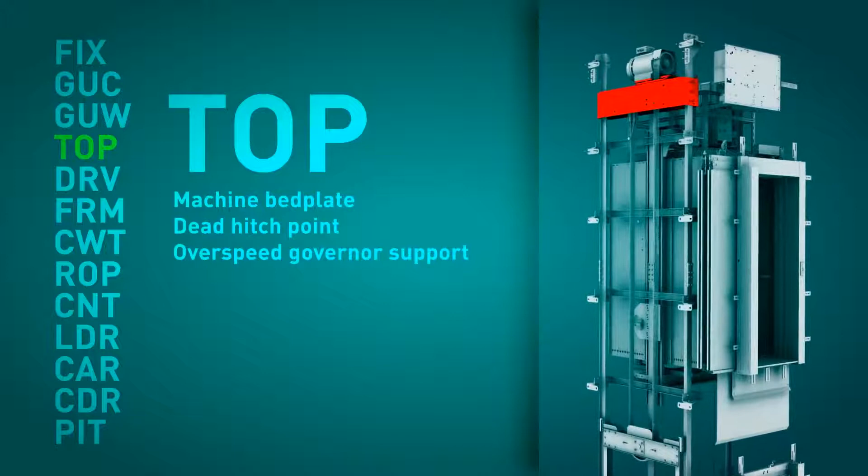Each module can be made up of one or more packages. These packages are identified with a description of the module and its position within the assembly sequence. The supply of the elevator has been designed to fit what we consider to be the logical assembly sequence of a machine roomless elevator.

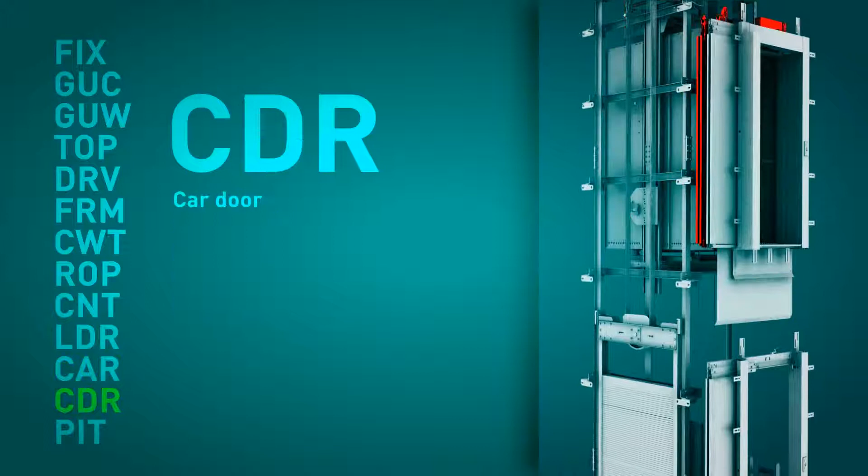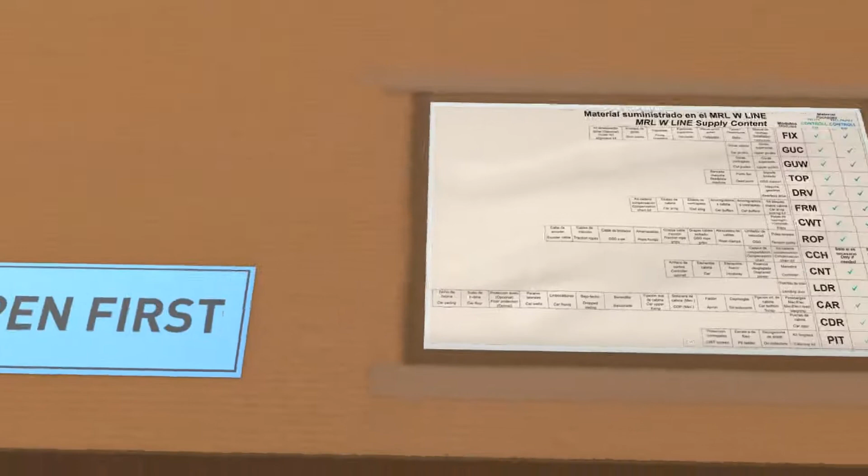The package that we have to open first is labelled and easily identifiable. Attached to this package, in a protective plastic cover, is the packing list and a document which details and lists the material supplied in each of the various modules.

In this first package, we can find the assembly manual of the elevator and all the assembly handbooks of the individual components. Before starting the assembly process, we strongly recommend the assembly technicians read all the manuals in detail.

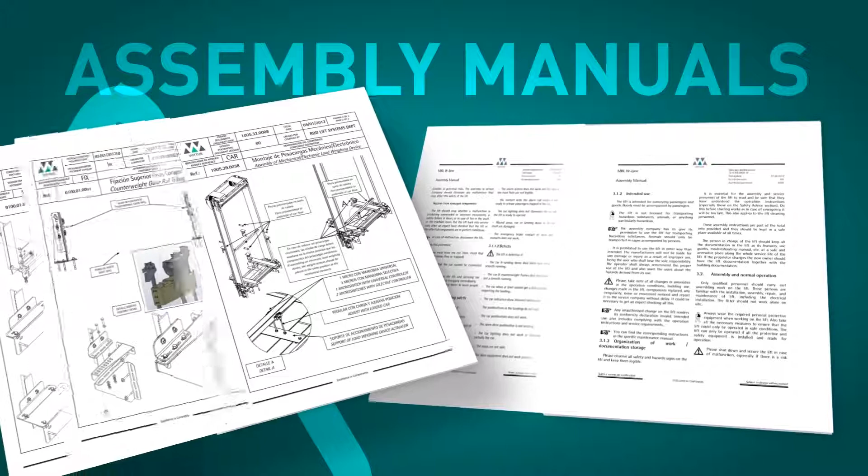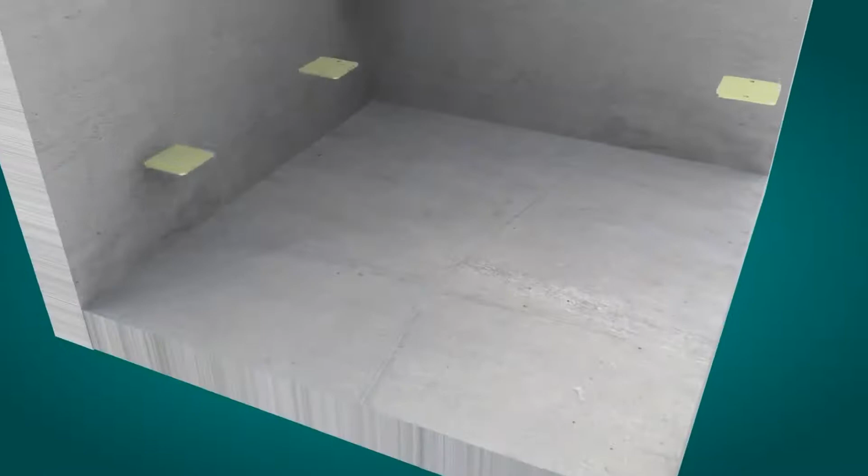The assembly of the MRLW line starts by checking that the conditions of the shaft, dimensions, cleanliness are satisfactory and that all the necessary material and auxiliary tools are available on site. The guide rail sole plate must be correctly positioned and levelled according to the assembly manual.

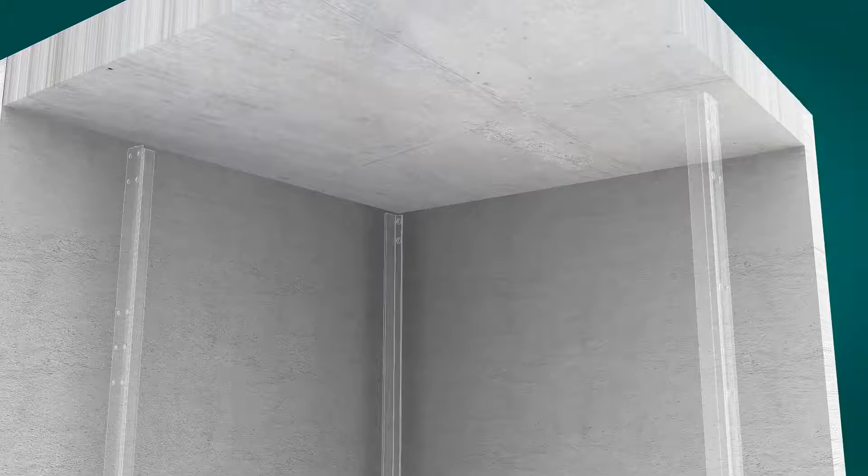The bottom portions of the car and counterweight guide rails are cut and assembled according to the installation drawings. Should there be a difference between the pit depth given in the installation drawings and the as-built depth, the bottom guide rail can be adjusted and cut to the right length.

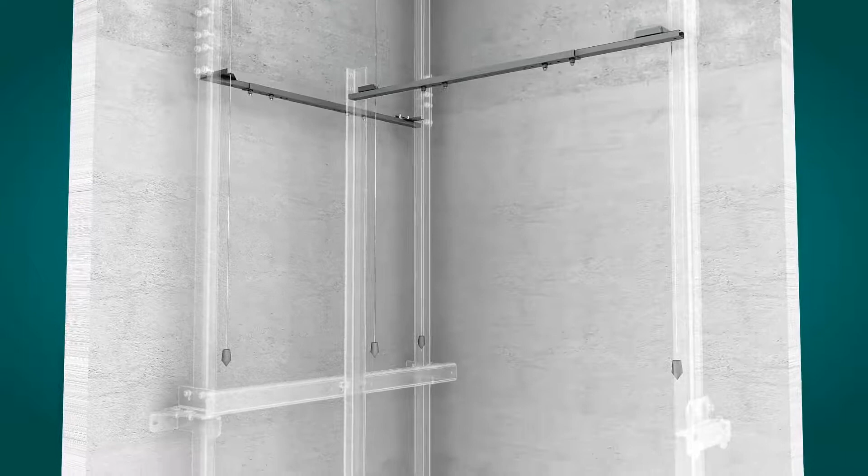A tool to help align the guide rails is recommended in order to guarantee a correct assembly. MP can supply a guide rail alignment kit upon request. The first row of guide rail supports is assembled. Their position is detailed in the installation manual.

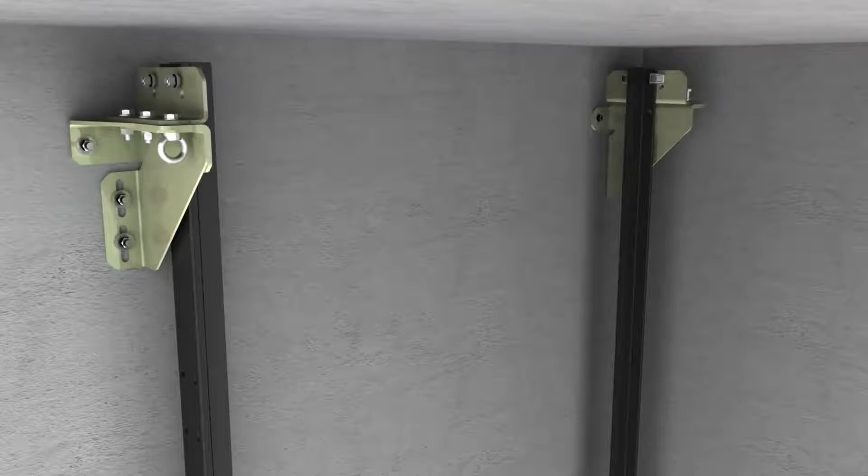With the help of some scaffold platforms, the successive guide rail portions, 2.5 meters or 5 meters, are assembled with their corresponding support brackets. Once the last section of the counterweight guide rail has been assembled, the topmost bracket can be fixed into place. The last portion of the car guide rail fixed to the bed plate is assembled once the machine support has been installed.

Alternatively, the process of assembling the guide rails can be carried out from a temporary platform which is fixed to the guide rails that have already been mounted and lifted up through the shaft by means of a block and tackle.

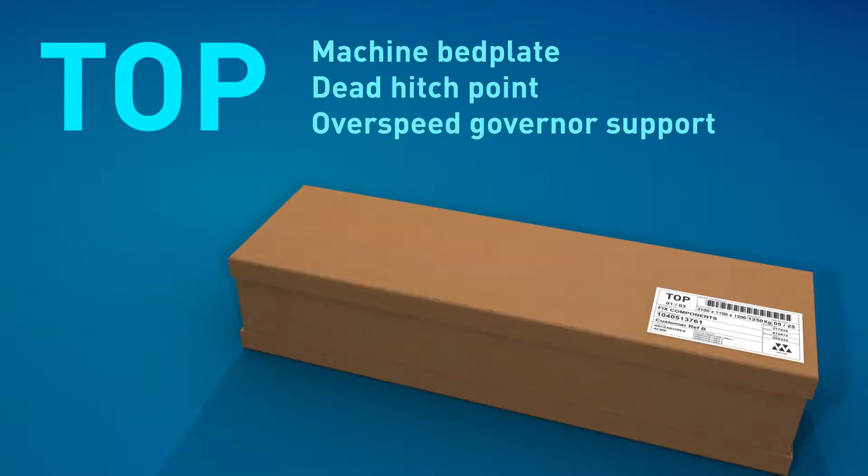The machine bed plate is assembled next. A comfort kit is standard supply for 1.6 meters per second, but optional, though highly recommended, for 1 meter per second. These low-frequency metallic cushions absorb any vibrations that the system may produce.

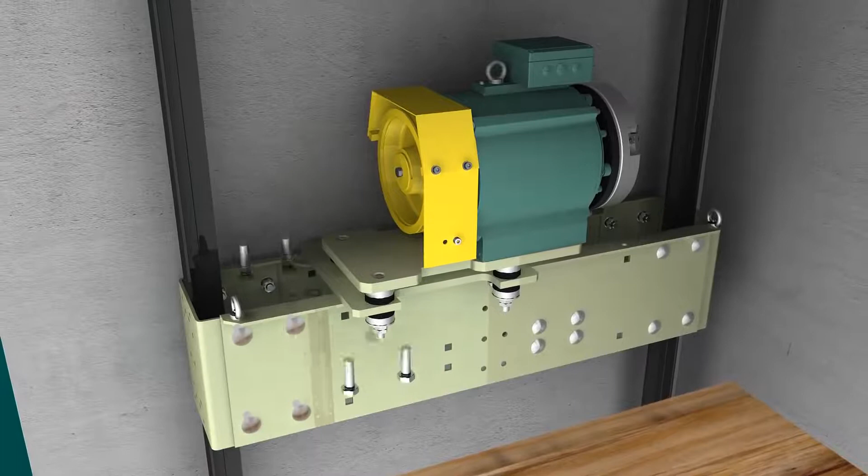The machine is fixed to its support and is lifted and guided into position with the help of a block and tackle. It is fixed to the sheave side with the fixings provided, and once the machine is level, these fixings and the clamp can be tightened. Once the machine is in place, the penultimate guide rail support and the last section of car guide rail fixed to the bed plate can be assembled.

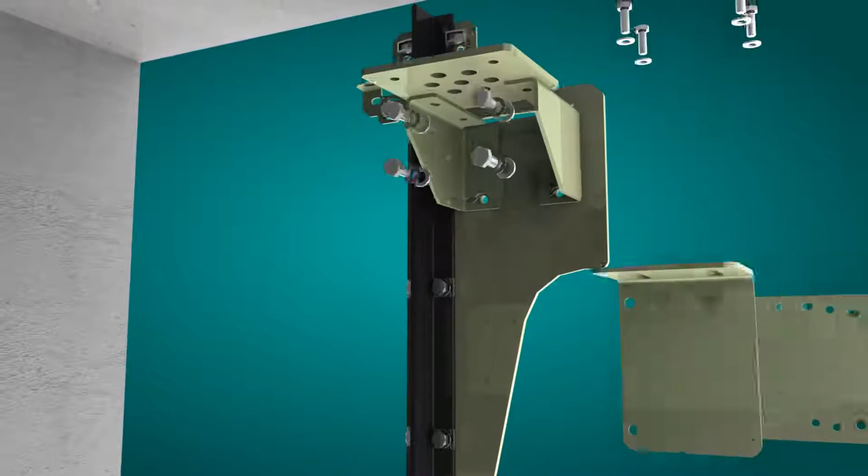The dead hitch point can now be assembled, followed by the overspeed governor and the slack cable control device, should it be applicable. At this point, all the mechanical elements of the elevator are assembled in the headroom. All the guide rail supports must be placed in the positions detailed in the installation drawings. The position of the top and bottom brackets is of special importance. Any scaffolding and platforms should be removed at this point.

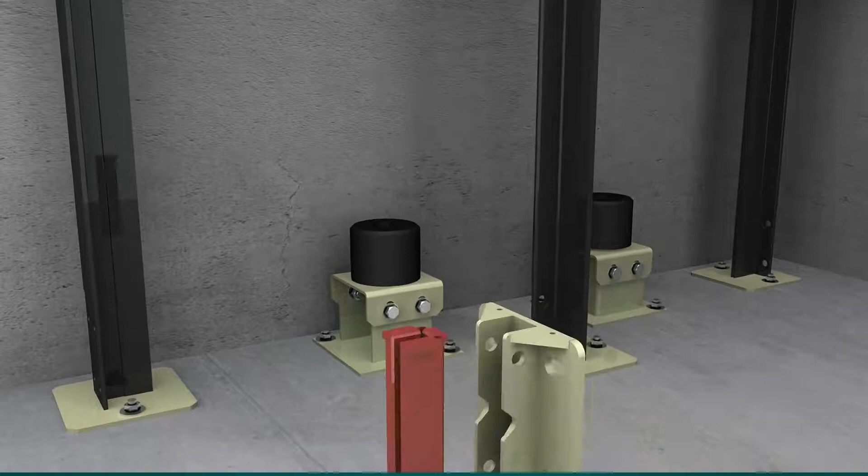It is now time to go into the pit. In the module FRM, we will find all the components relating to the car and counterweight frames and the buffers. The counterweight buffers should be assembled first of all in the position detailed in the installation drawings. Resting on its buffers, the counterweight frame is then assembled.

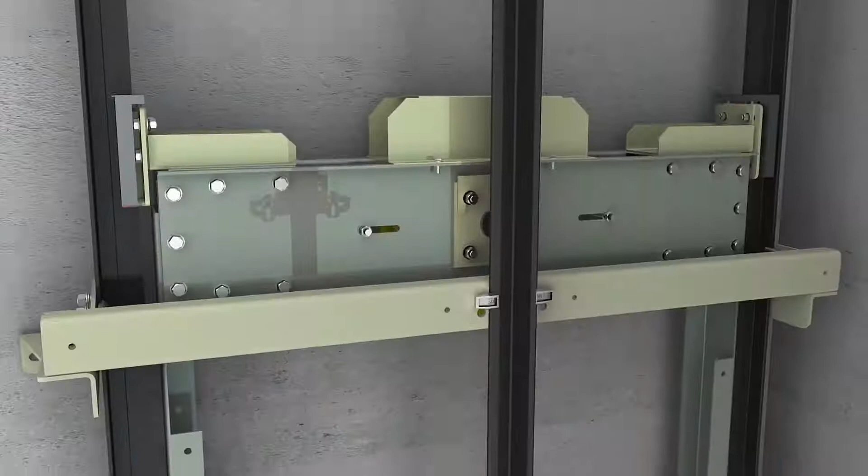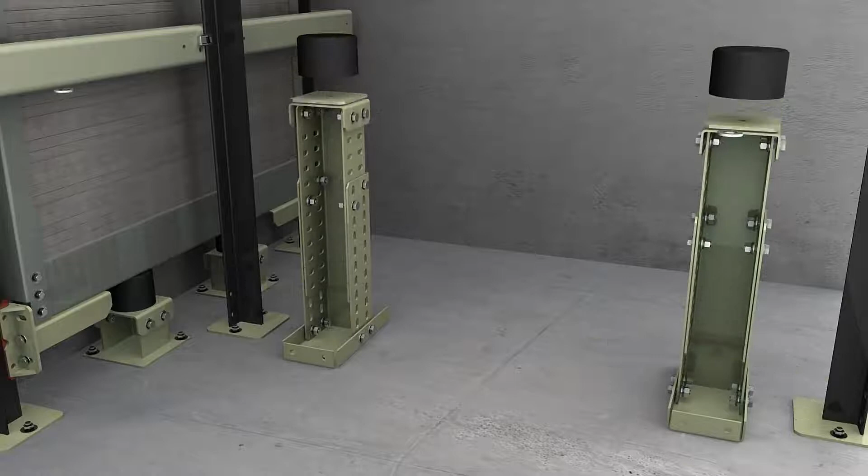A partial loading of the counterweight should then be carried out, according to the individual assembly requirements of each elevator. The car buffers are assembled next, in the position detailed in the installation drawings. Resting on its buffers and on the car floor, the car frame is assembled. As an optional accessory, Fitur offers a temporary protection to protect the car floor whilst the assembly process is taking

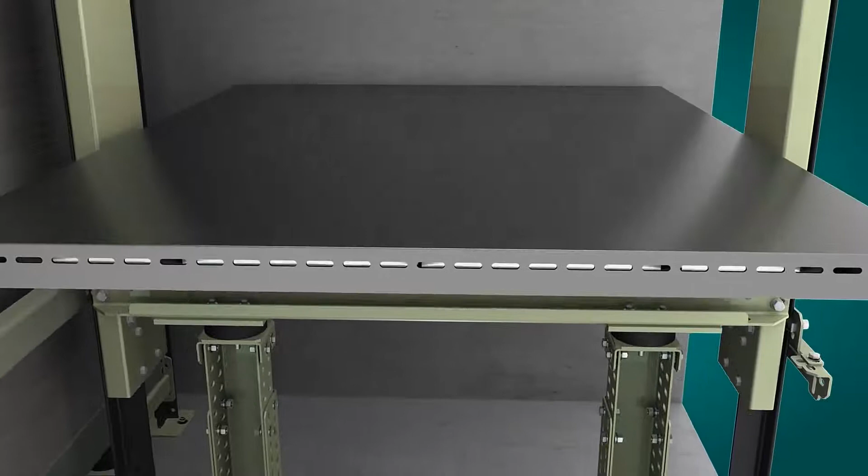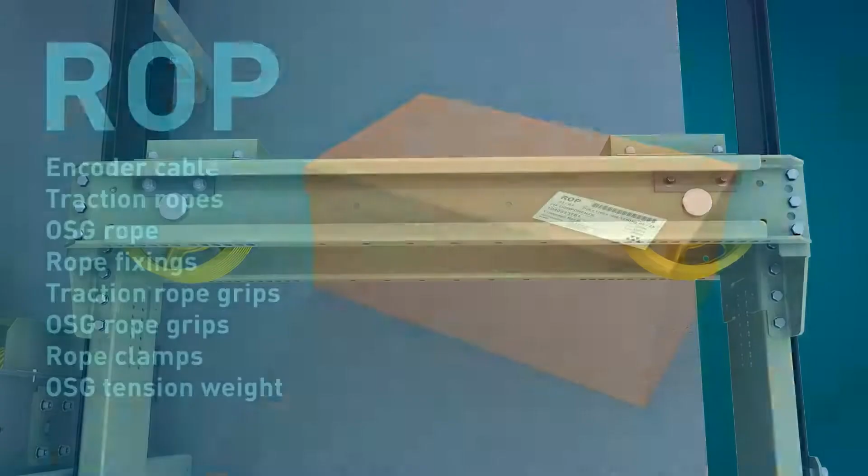place. The slings are now correctly assembled and positioned within the shaft and between the guide rails, and it is time to suspend the car slings in order to assemble the traction ropes. All the necessary material is supplied in the module ROP. The machine should previously have been connected to the power with the encoder cable.

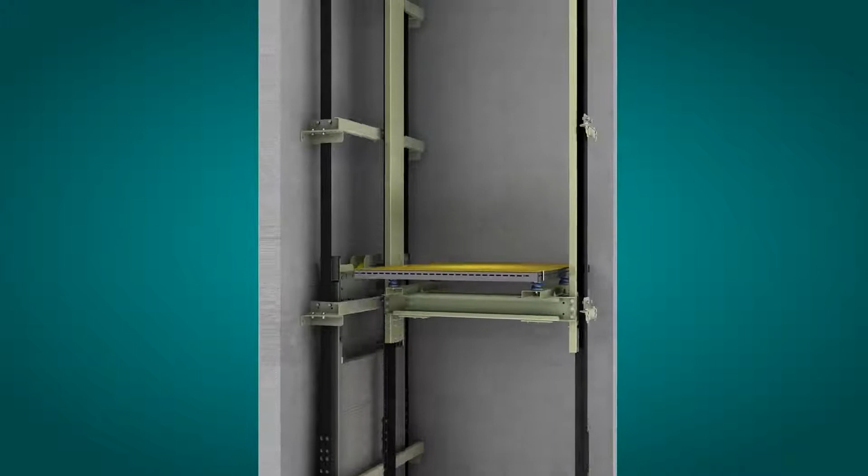The car sling is then lifted with a block and tackle to the highest floor that allows the floor of the car to lie flush with the landing FFL. Its position is maintained by means of the car frame locking kit. This element has not been designed to specifically suspend the car, but to fulfill the function indicated in clause 6.4.3.1 of the standard EN 81-20.

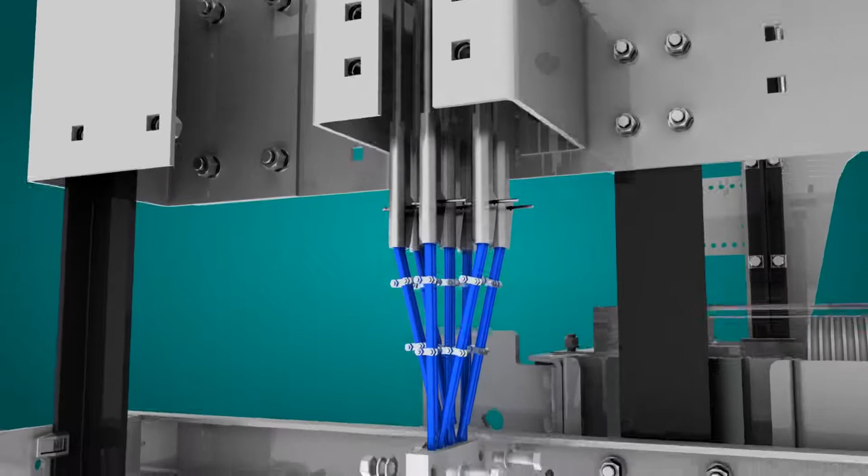For the assembling of the traction ropes, please follow the instructions detailed in the elevator's installation manual. Repeat the process as many times as needed. A rope clamp guarantees the correct alignment of the ropes as they are fed into the grooves of the sheave.

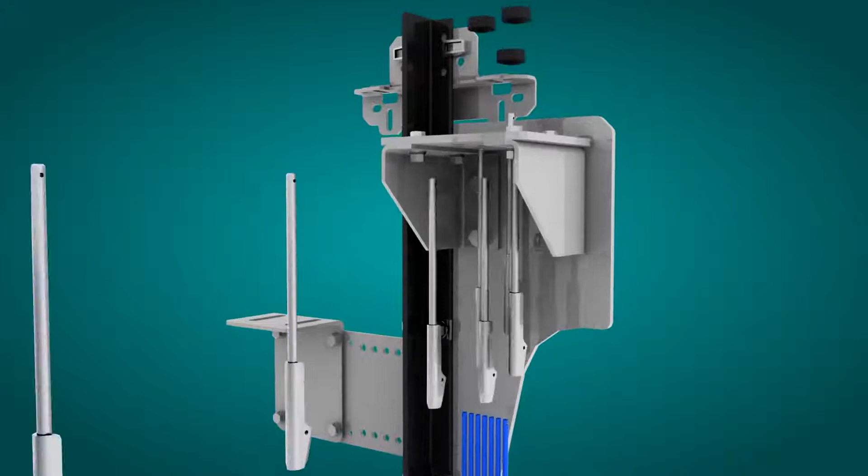The next step is the assembly of the overspeed governor, its tension weight and the cable that joins them. The fixing of the overspeed governor cable to the frame is the last stage of this sub-assembly. At this stage, the elevator can be used as an elevating platform with the use of an assembly operating panel. The elevator must be handled with great care during these journeys. With the help of the elevating platform, the landing doors are assembled.

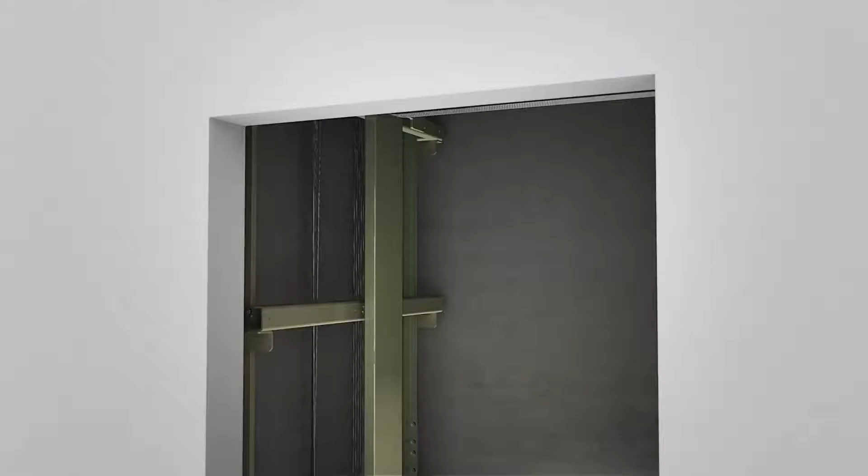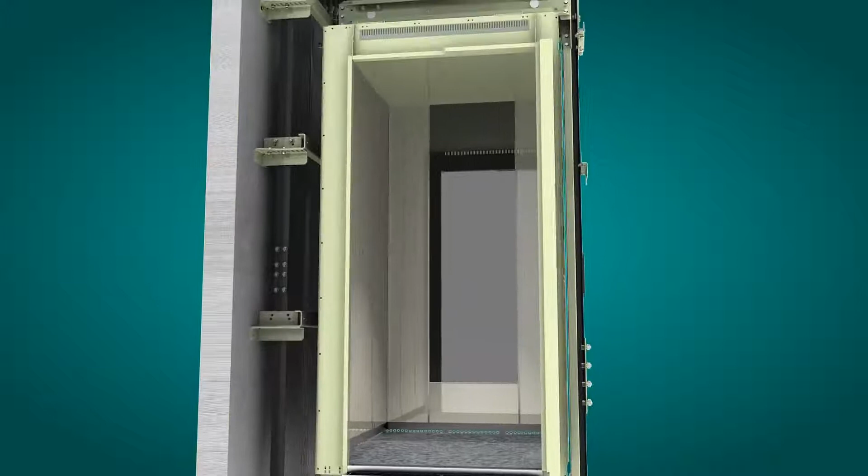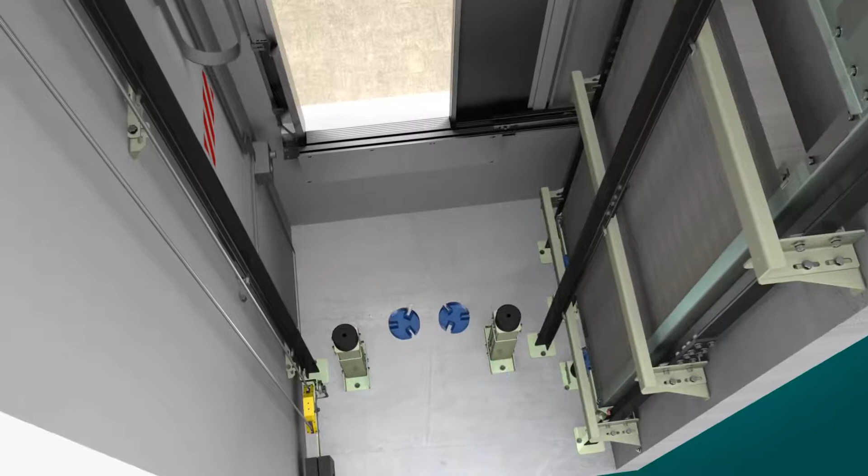Before starting the assembly of the car, it is essential to mechanically block the car frame and to remove the floor protection should it have been used. It is now time to assemble the car door. The pit components can now be put into place. The counterweight screen is fixed to the guide rails, and should it be applicable, the pit ladder is fixed inside the pit. From this point onwards, the electrical elements can be assembled.

The MRL-W line controller, with its plug-and-play concept, is probably one of the market's most easy and intuitive controllers to install. It is delivered perfectly packed and identified in 4 packages: power and control, pre-assembled electrical installation of the shaft, electrical elements of the car, and the controller cabinet. In each of these packages there are various assembly kits, each one accompanied by a description of its contents and an assembly manual, numbered according to the assembly sequence.

The controller cabinet, with its reduced dimensions, is placed neatly in front of the frame of the landing door located on the last floor. The simplicity of the controller does not reflect its features. The MRL-W line controller can be supplied also according to other standards, such as EN 81-70 and EN 81-73. Upon request, it can also be adapted to the EN 81-71 and EN 81-72.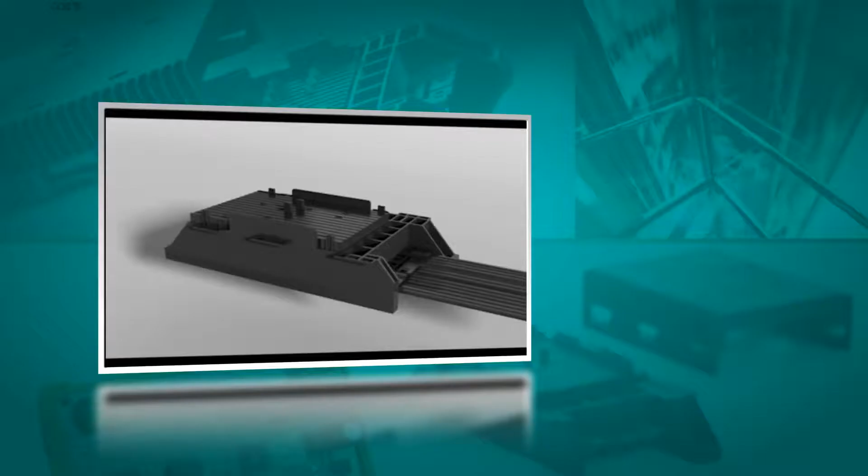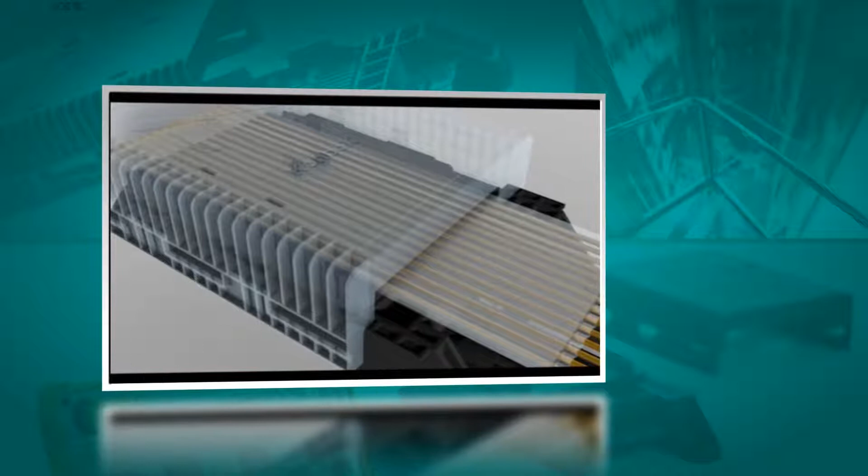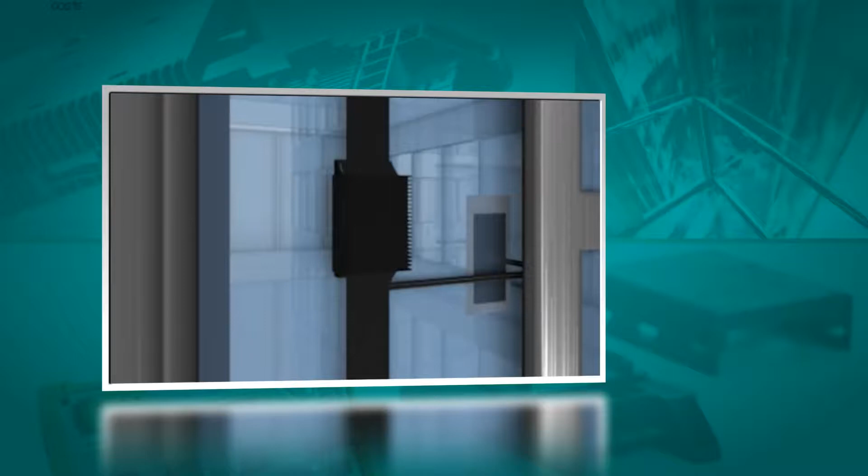Our pre-assembled electrical installation uses the CON-box system, which greatly reduces the assembly time, guarantees the quality of the CAN bus signals, and sets us apart from our competitors. The flat cable is manufactured with highly resistant and durable materials, which guarantee an optimal protection of the low-frequency CAN bus signals. An absolute positioning system of the car by means of a 4096 pulse encoder is optional. This makes assembly easier and guarantees millimetric precision of each stop.

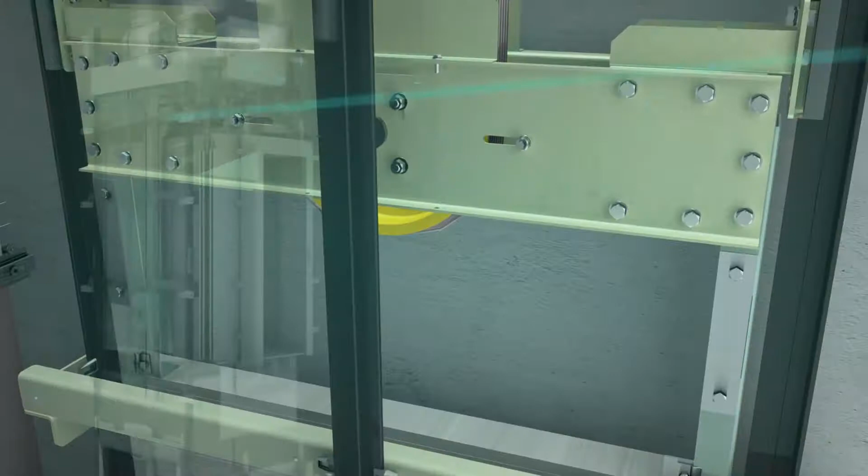The penultimate task is the important one of cleaning the shaft and the pit, and of oiling the guide rails. Finally, before the lift can be put into service, the MRL-W line must be submitted to a series of tests, according to Annex D of the EN 81-20, in order to ensure the perfect functionality and safety of the lift. Fitur supplies a specific document which guides the assembly technician through all the steps that must be carried out.

Fitur has been issued by IONOR a conformity certificate, confirming the implementation and maintenance of a quality assurance system for the design, manufacturing, and final testing of elevators, and certifying that it complies with the requirements of Annex 1 of the Lift Directive 95/16/EC. This means that any assembly company with a quality assurance system compliant with the Annexes 12 Module E or 14 Module D of the Lift Directive 95/16/EC can put the lift into service and certify it accordingly.

Fitur can also supply the necessary documentation, allowing any assembly company without a quality assurance certificate the possibility of certifying the elevator through an external notified body according to Annex 6.